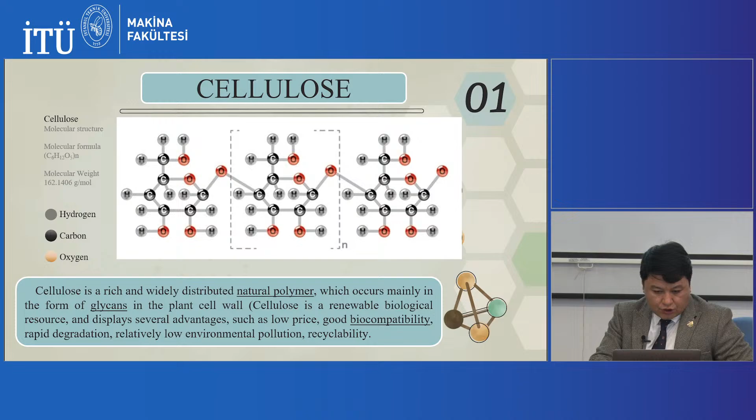Since we usually obtain paper-like materials, wood cellulose is very suitable for research, but there are very few trees in our country, as I mentioned before. So we decided to use cellulose from annual and perennial plants in our research. In our current research, we are using the paper tree and miscanthus, which belongs to the perennial plant class recommended by our botanists. Our raw materials are paper mulberry and Miscanthus giganteus. Other countries obtain cellulose from other plants, bacteria, tunicates and algae.

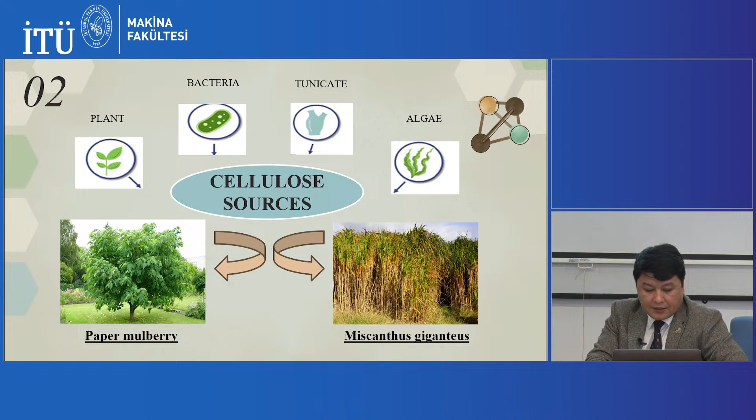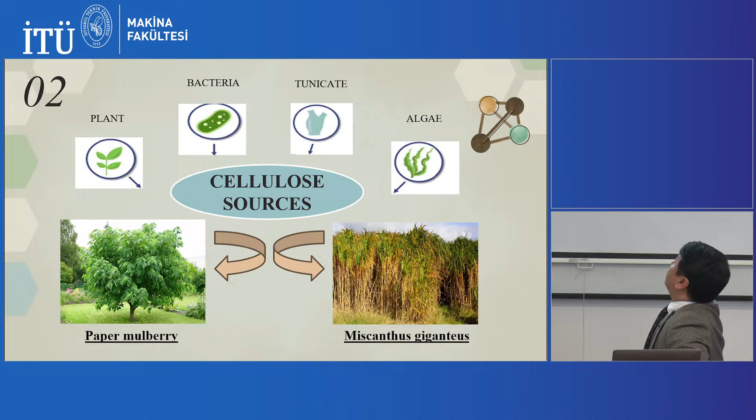The next slide shows our research and the quality indicators of cellulose obtained from the paper tree: the amount of cellulose and degree of polymerization. For paper, these properties are very important. For our reaction the very suitable chemical is sodium hydroxide. Firstly we cook the tree, then obtain cellulose, then there is a bleaching process, which is very important for paper-like materials.

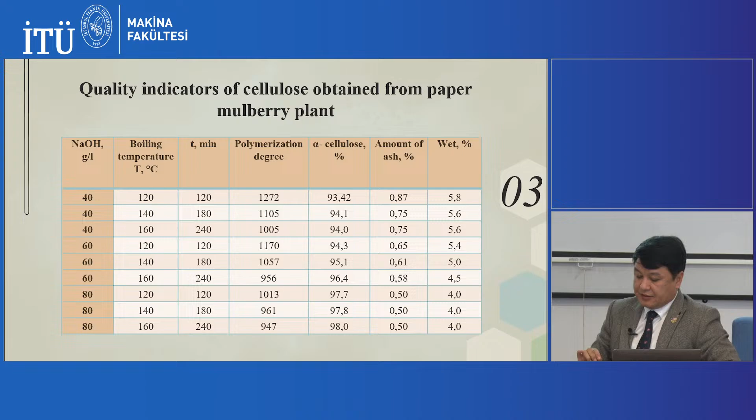For the bleaching process in our research we use hydrogen peroxide; in many countries it is carried out with sodium hypochlorite. We do not use that reagent because chlorine has a negative effect on health. This process is very important because if bleaching is done incorrectly, the cellulose fiber will be destroyed, which limits the scope of use of the cellulose. Whiteness is very important for these materials, as is the degree of polymerization.

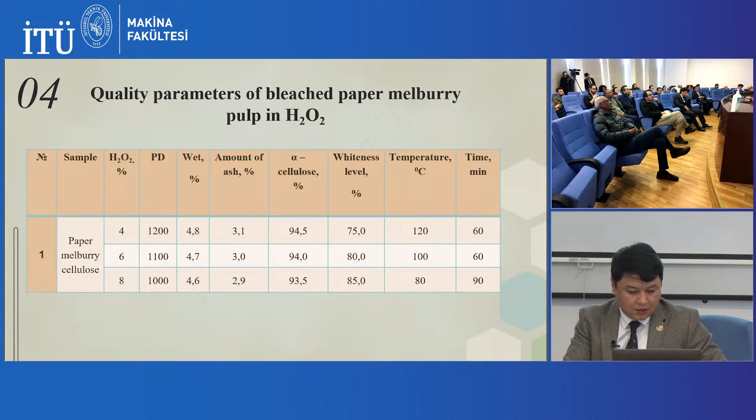In order to further the research, we use modern research methods of physical chemistry, including spectroscopy, thermogravimetric analysis, etc. You can see it presented here.

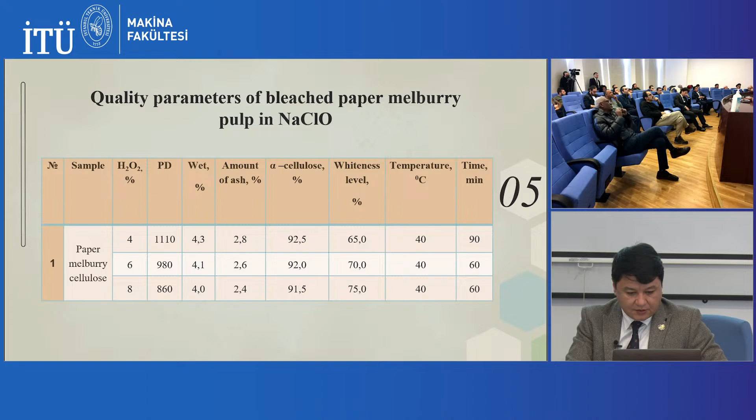Another slide is our research. We took the next step in our research: investigating the effect of chitosan in the paper industry. You know that the structure of chitosan and cellulose is similar, just the amino group is different. Chitosan is a linear polysaccharide derived from chitin, a natural biopolymer found in the exoskeletons of crustaceans such as shrimp, crabs, and lobster,

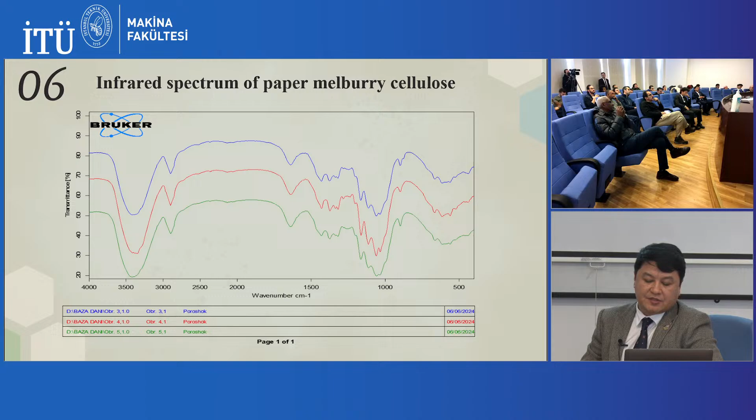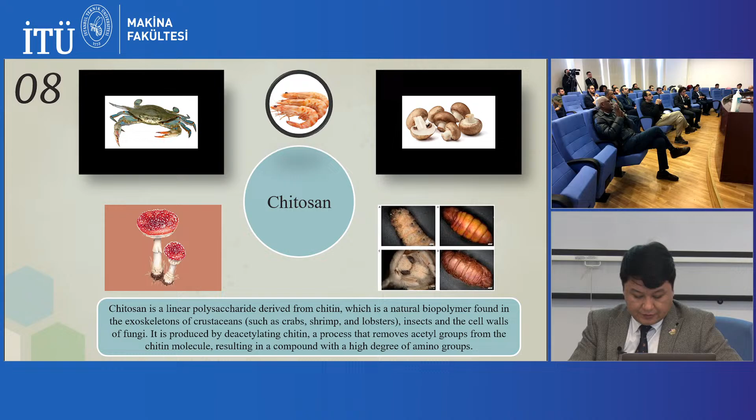and insects and fungi. In our country, that's why we use chitosan from the silkworm. In our country, science nowadays is obtaining chitosan from the silkworm. There are four steps to obtain chitosan: firstly preparation, then the deacetylation reaction, neutralization, and purification. You can see the reaction, deacetylation. Deacetylation is very important for polymers.

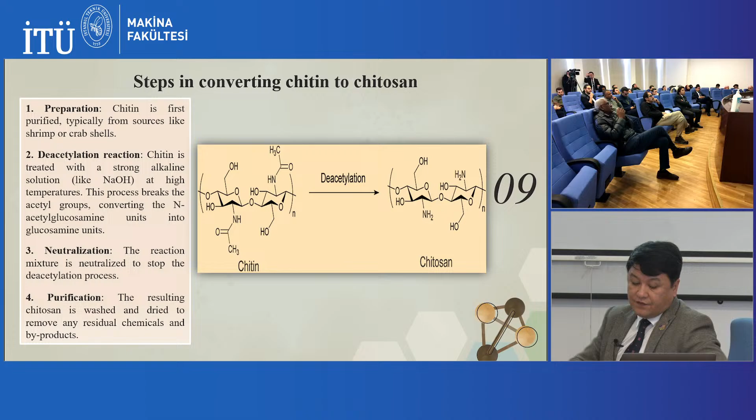Firstly, enhancing paper strength, improving surface properties, and, very important, antibacterial properties. Next, environmental benefits. Currently every country is looking for environmental benefits in every material. The last one is modification of the paper's optical properties.

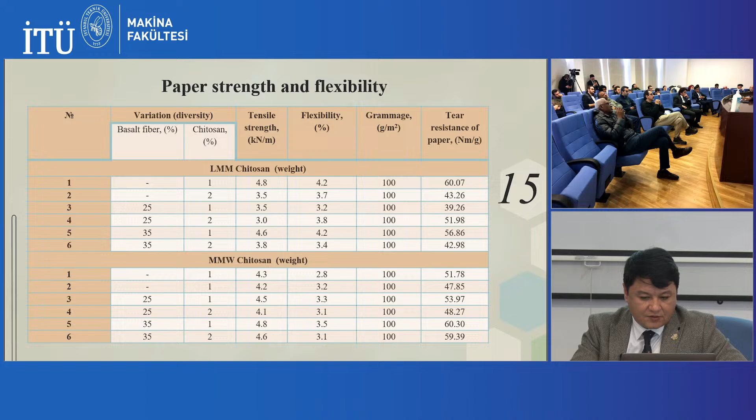So as a continuation of our research, we became interested in nanocellulose. Nanocellulose is very popular currently and very suitable for everything; scientists in every country are interested in this nanofiber. Nanocellulose is applied in our next step of my research. Nanocellulose is used in the paper industry. As you all know, nano-sized materials are currently of great interest.

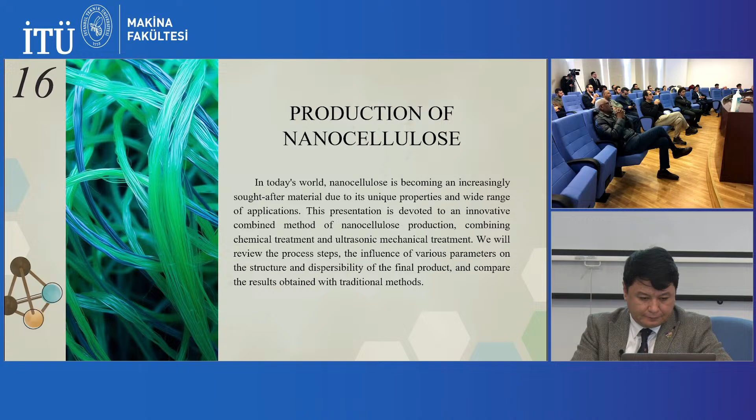The next slide shows three types of methods: mechanical methods, chemical methods, and, as I told before, combination methods. We learned three types of methods. Currently, we use combination methods for obtaining nanocellulose. There are various methods of producing nanocellulose, and each has its own advantages and disadvantages. So we are learning these three types of methods, including combination methods.

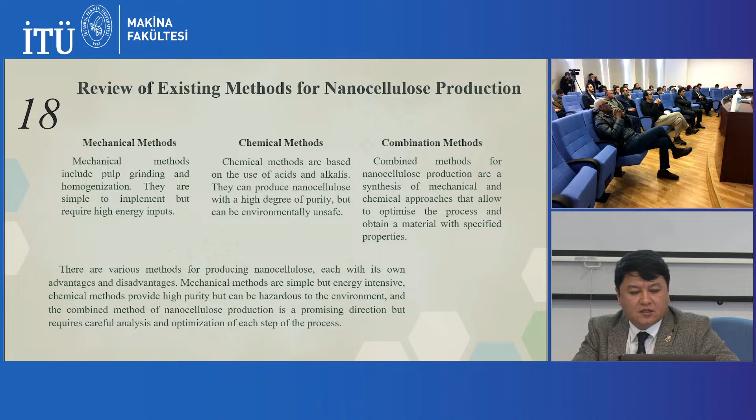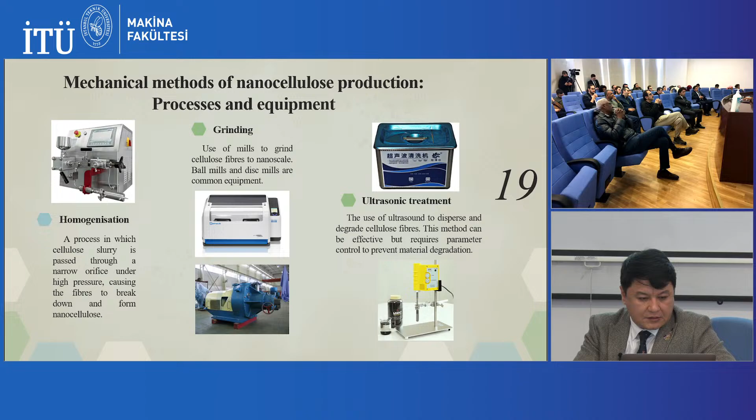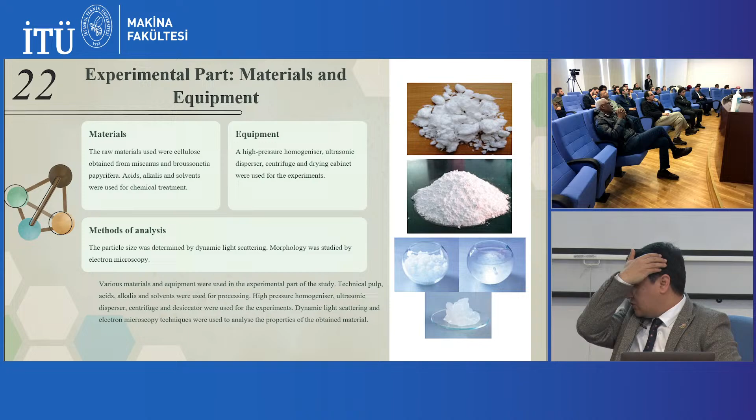So next slide. We need experimental materials and equipment for the experiment. First of all, we collected the equipment and the materials. We use the raw materials from our country I mentioned before. The raw materials used were cellulose obtained from miscanthus and Broussonetia papyrifera. Acids, alkalis, and solvents were used as chemical treatments.

Equipment. One slide before I told you the three types of equipment and the methods. The particle size was determined by dynamic light scattering. Morphology was studied by electron microscopy. Okay. You can see the first and second are our experiment results. So various materials and equipment were used in the experimental part of the study. Technical pulp, acids, alkalis, and we used high pressure processing. Firstly, a high pressure homogenizer, ultrasonic disperser, centrifuge, and desiccator. These we used in the experiments.

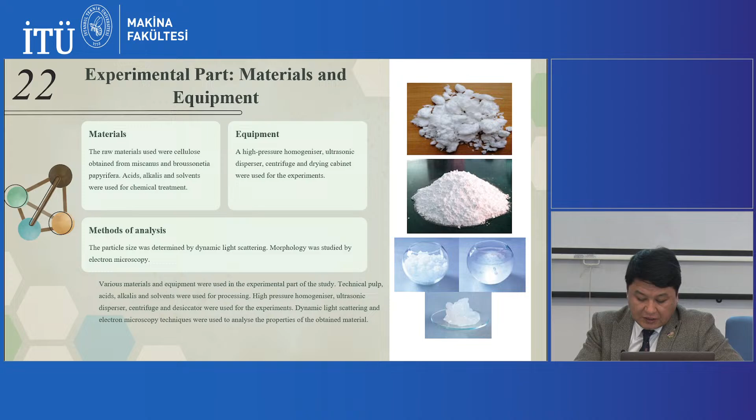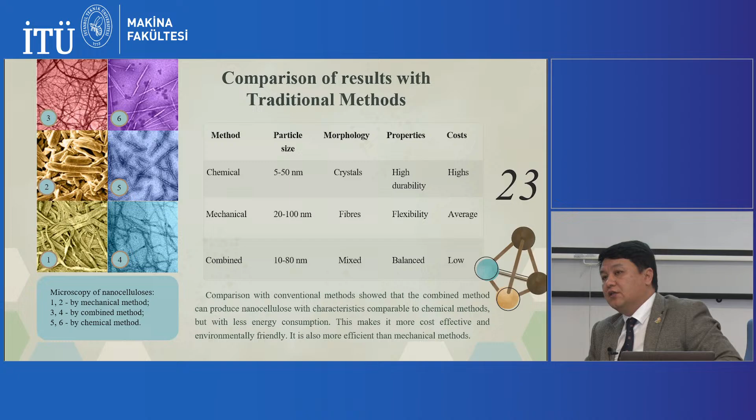Next slide: we obtained the cellulose by three types of methods. We compared every result. You can see the methods: chemical, mechanical, combined. The particle size is different, the morphology, its properties, costs. We chose the last one, combined methods, because first of all it is low cost, and the nanocellulose size is suitable for our research.

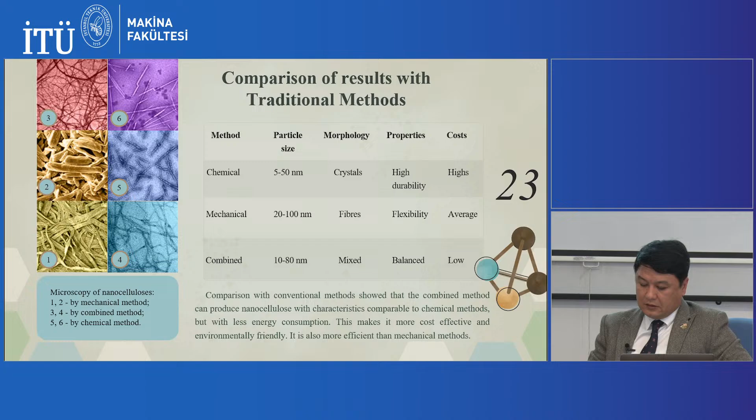Next slide shows the application areas of the obtained nanocellulose. You can see a very popular application is cosmetics. Women know that cosmetics prepared naturally are very suitable for health and for the body. So medicine, cosmetics, composite materials. Currently nanocellulose is used mainly in paper materials. I use nanocellulose in money paper. Money paper is why it's very comfortable. On the chemical side, its mechanical properties come from hydrogen bonds.

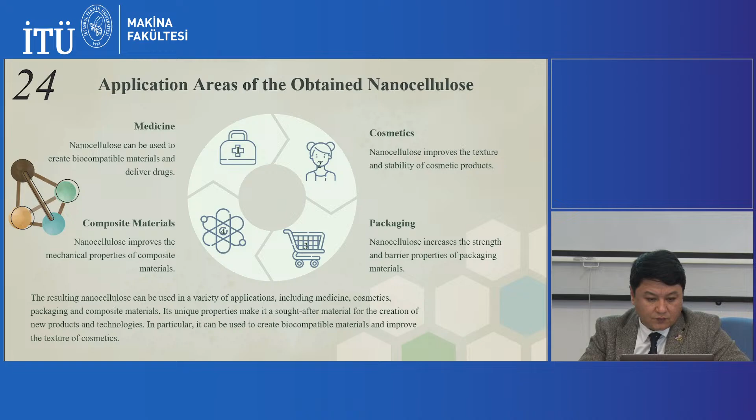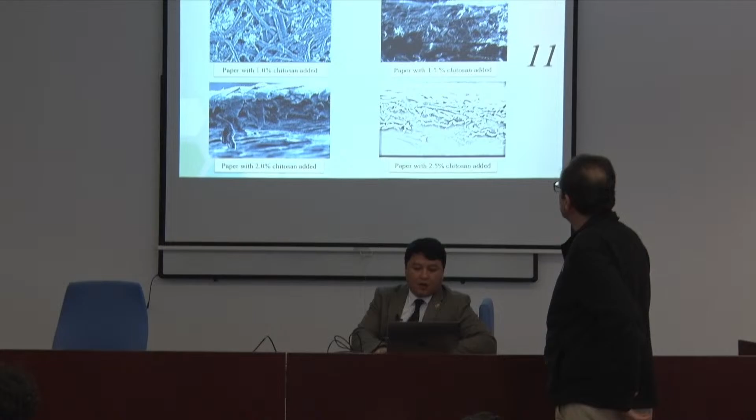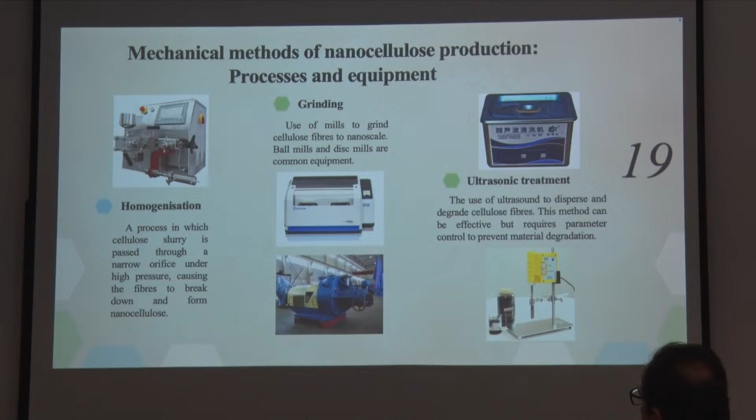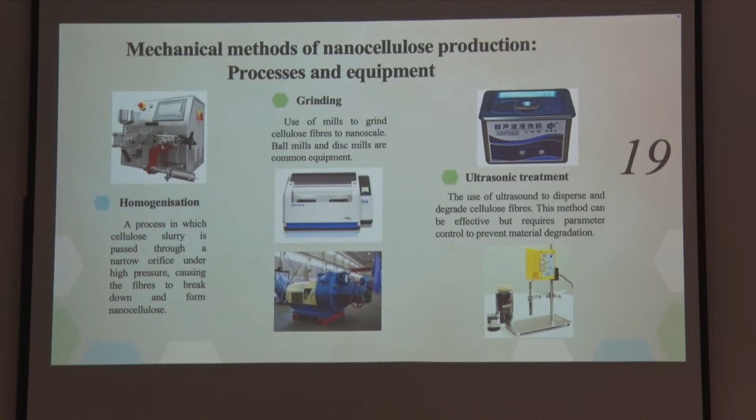Thank you for your presentation. Welcome to our university. I have a question. Can you explain how you obtain nanocellulose? The first step was homogenization and the second was grinding, right? Uh-huh. Okay. Previous, I think. Sorry. Yeah. Nanocellulose: currently in our research, firstly we obtain cellulose. After that, grinding to cut the fiber. After that is ultrasonic treatment. My student uses in the research very important equipment, ultrasonic treatment.

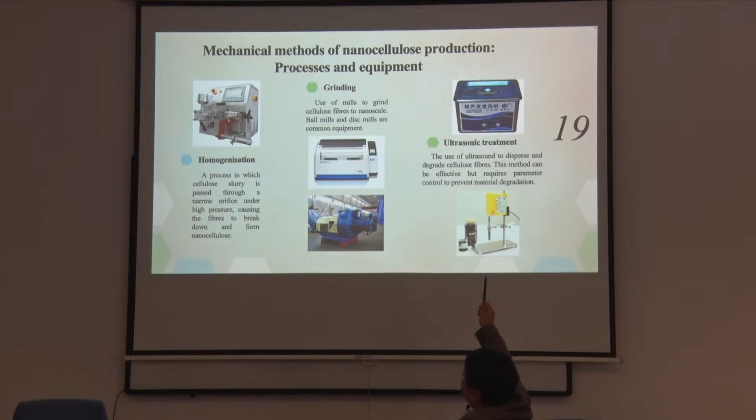Actually, I cannot understand. Firstly, you break down what? Break down this to nanocellulose. Cellulose, you know, is a natural fiber. The fiber, firstly the big size is cut. After that is grinding. After that it's very small, nano sized fiber. How can you grind the broken ones? The first one is centimeter size. Next one is millimeter, and then nanometers.

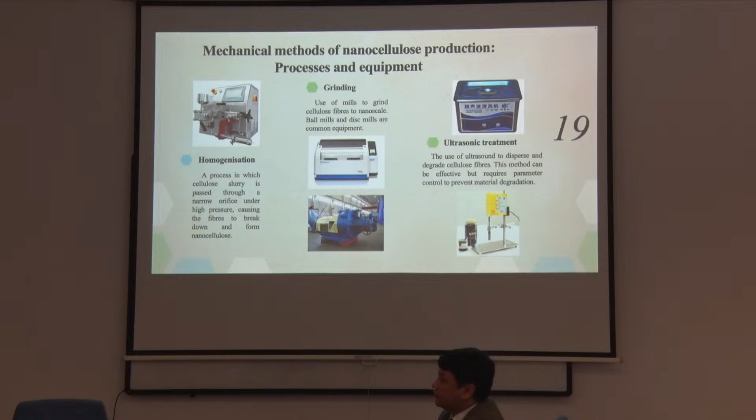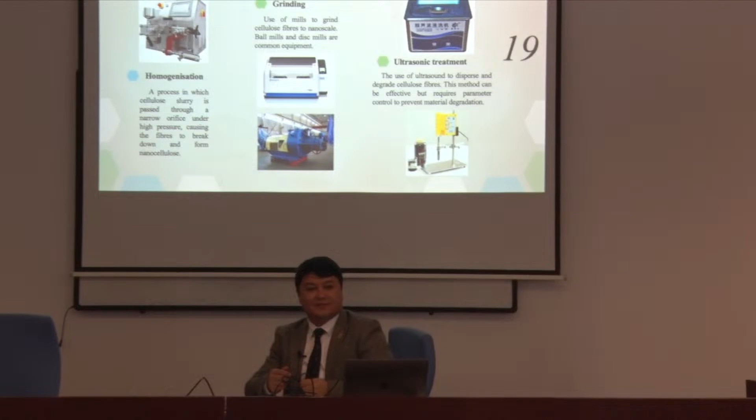Thank you very much. Any other questions? Any comments? Yes. Next. Thank you, Professor. Welcome here. I have a question, first about the motivation. What was your idea in starting this research topic? Is it because you have a lot of rainforest or green supplies that can be turned into nanocellulose? Or is it just basic science aspirations?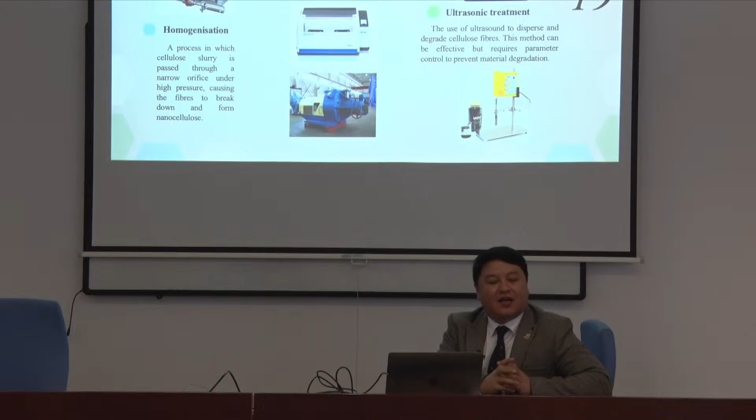Okay, thank you for the question. Our research belongs a little bit to politics. Every year, our president names a theme for the year. This year in our country it is ecology, environmental protection and green economy. That's why I chose this topic. That's why it belongs to politics. Okay, the next part is kind of a recommendation and also a comment.

It's about the nanocellulose production. Thanks for showing us - before joining here, I was part of University of Michigan in the United States, and a lady from my group was working on nanocellulose to increase the strength of composite materials. At that time, they accidentally discovered that when they fed nanocellulose particles to plants in order to grow fiber for composite materials, the plant itself performed better - it acted like a fertilizer instead of just strengthening the material. So they immediately filed a patent for this. My question is, if in the future they want to collaborate with you, what should they do? Do you have enough supply of nanocellulose for them?

In the future, we will collaborate together. A professor told me that sometimes your university will use this. That's why in the future, including nanocomposite materials, we will use all of this. Firstly, we use nanocomposite material, nanocellulose, just for paper, and other fields in the future. You recommended - okay, I guess I partially got my answer. Thank you, it's a new field. Yeah, it's for fertilizers.